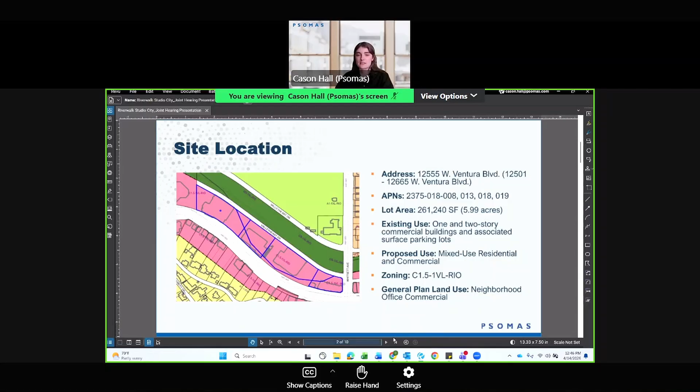The applicant proposes to redevelop the site by removing all existing buildings and surface parking and constructing a new mixed-use project consisting of three 7-story buildings with a total of 814 residential units. This includes 46 units designated for very low income. The project also includes three 2-story commercial buildings, providing just under 76,000 square feet of commercial space. The project will provide nearly 90,000 square feet of open space to serve the residential buildings, including 2 outdoor pools, multiple courtyards, and over 21,000 square feet of private open space. The applicant is proposing 1,806 parking spaces within 4 subterranean levels.

The parking spaces will be designated for residential and commercial use separately. Vehicular access will be provided through 2 driveways on Ventura Boulevard and 2 on Valley Heart Drive, and the project proposes a new traffic signal at the main Ventura Boulevard entrance. The commercial and residential portions of the project will be linked aesthetically by design, but individually distinguished by colors and materials that will create 2 distinct districts. A centrally located landscape plaza will anchor the commercial district, and it will open directly to the LA River multimodal trail entrance at Valley Heart and Whitsett, enhancing walkability and activating the area.

There are several entitlement requests associated with this project. First, the project is requesting a 25% density bonus by reserving 7% of the base units for very low income. Along with that density bonus, the applicant is requesting several waivers and incentives, including increased FAR, increased lot coverage, increased height, reduced rear yard setback, a waiver of transitional height requirements, and a waiver to allow volume averaging with hybrid cutouts and stepbacks.

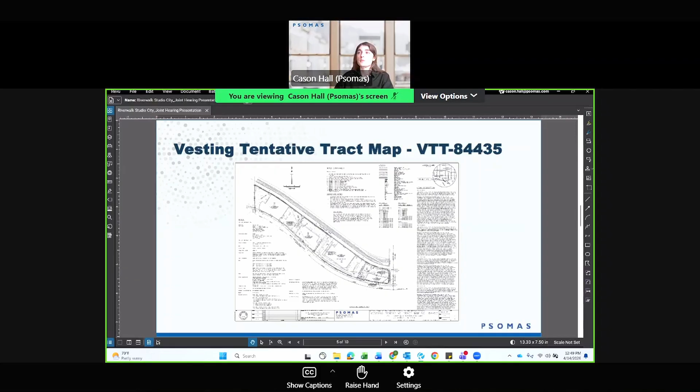The vesting tentative tract map proposes to subdivide the site into 2 master ground lots for 2 phases of development, 3 residential airspace lots, 5 commercial airspace lots, and 8 airspace lots for subterranean parking. The project will be built in 2 phases, 1 for each ground lot.

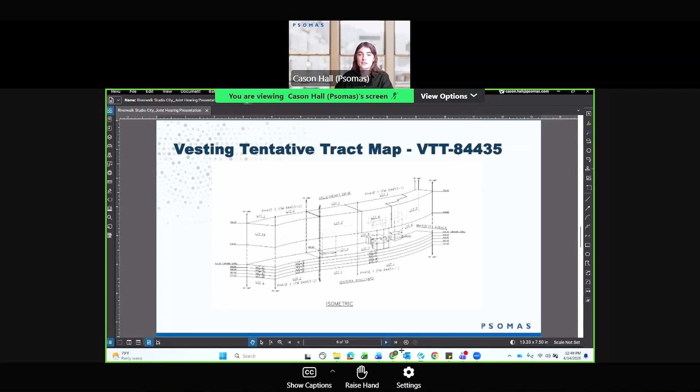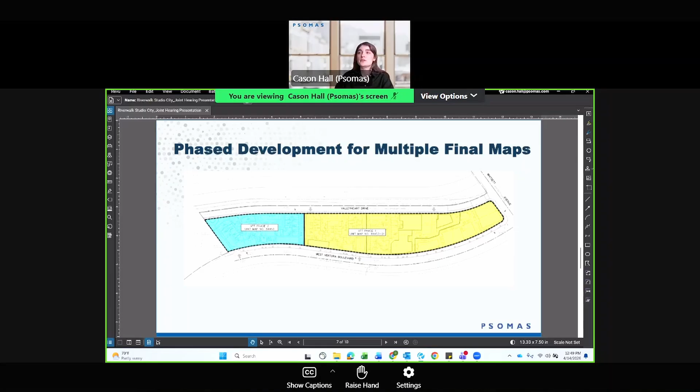As mentioned earlier, the project will be built in 2 phases. Phase 1 includes 2 of the residential buildings, all of the commercial buildings, and 4 levels of subterranean parking. Phase 2 includes the final residential building and its associated 4 levels of subterranean parking.

Throughout the entitlement process, the applicant has conducted extensive community outreach led by Nicole Kuklok-Waldman, who's very familiar with the Studio City area. Outreach has included engagement with the Studio City BID, Neighborhood Council, and Chamber of Commerce, Harvard Westlake School, Council District 4, Friends of the Los Angeles River, and many surrounding property owners and tenants.

The project also maintains an active website, Instagram, Facebook, and Nextdoor presence where updates, event notices, and contact information are regularly posted. The team has also attended multiple community events, presented to the Neighborhood Council in October 2025, and is scheduled to present to the Neighborhood Council Board on April 22nd, 2026.

The applicant also mailed notices to surrounding neighbors and hosted open office hours to answer questions and discuss the project directly with community members. We would like to thank Audrey Melkonian and the Los Angeles Department of City Planning for all the hard work getting to this point.

The applicant team has reviewed the Vesting Tentative Tract Map staff report, and we would like to note a few minor items for the record. The map in the case file currently shows a 5-foot dedication on Ventura Boulevard. This was initially anticipated based on BOE's preliminary review. However, in the full BOE report, it was determined that the dedication is not required.

The applicant has prepared an updated map to stay consistent with the BOE recommendations in the staff report, and this map will be used for future review and for final map compliance. Additionally, the relevant permit listed on page 1, paragraph 4 was the preliminary zoning assessment conducted by LADBS and is not the full building permit application.

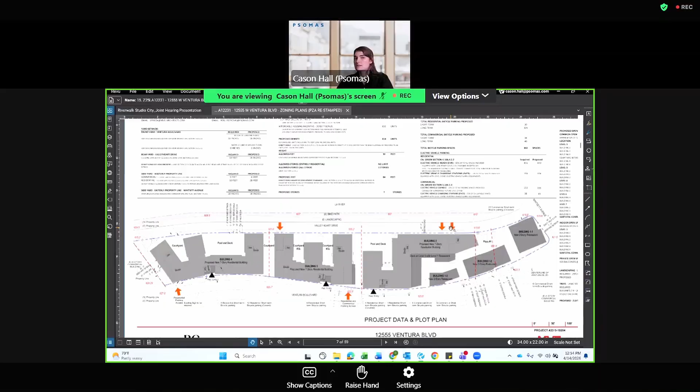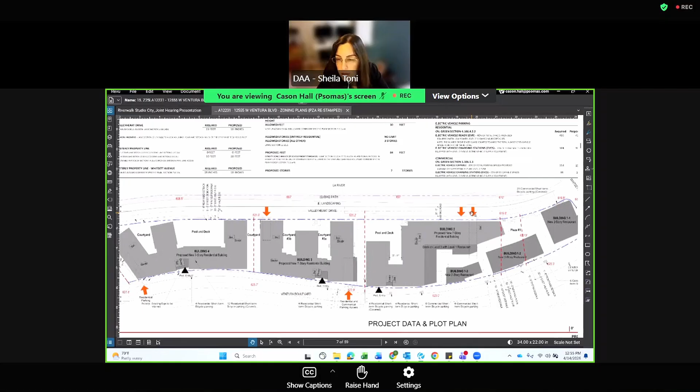Can you state it into the record? So Valley Heart entering and exiting the site is off of... let me check, it's a little small on my end. This site plan doesn't have the arrows, so I think the other one is best to show. I believe there's in and out on this main one, and I need to confirm if there's in and out on all of them, but definitely on this main one, on Ventura, mid-block.

Okay, great. And again, where's the signal? It's proposed in this mid-block, and you can see the proposed new crossings here. These will all be subject to future review by the city and B permit. So this is the proposed traffic light. And all of the entrances will be both in and out.

Okay, and as far as during construction, can you summarize or briefly explain your staging plan and where you'd like to put all the equipment to build phase 1?

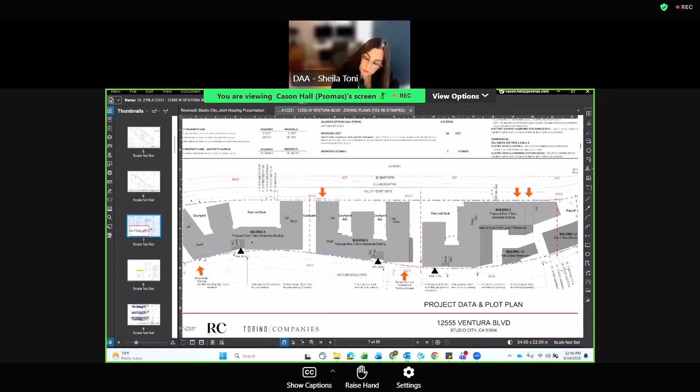Okay, so I have a staging plan, this is from our contractor. They're going to work on the project from west to east. So the western portion, this is for phase 1 specifically. The western portion of the site will be used for staging.

Can you hover over the area for members of the public to see? Yeah, definitely, let me just make sure I'm... take your time.

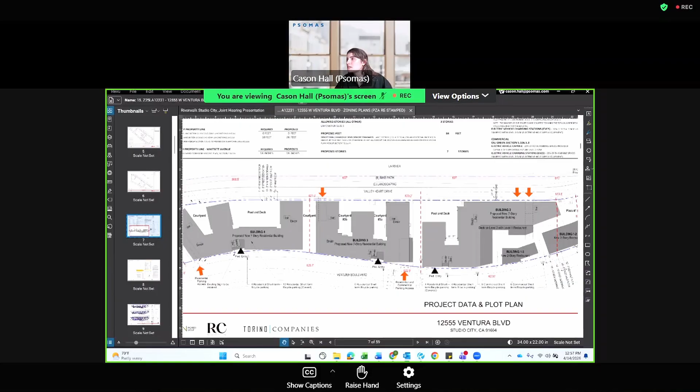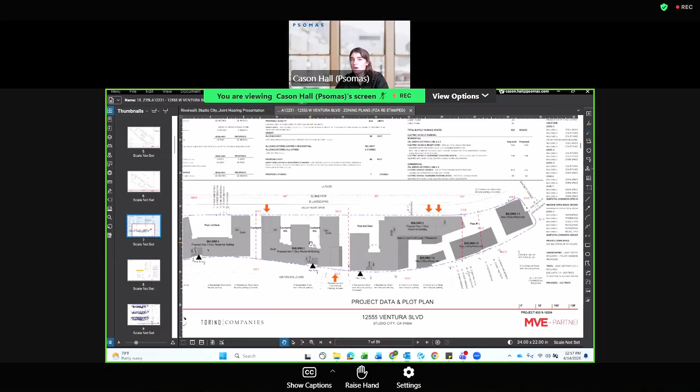So phase 1, essentially the divide is this courtyard. Phase 1 will be constructed first, with building 2 being the first construction, followed by building 3. So they're essentially moving from east to west on the project site, and then phase 2 is over on this side, which will be constructed second, following phase 1.

Great, and what is your estimated timeline for phase 1 and phase 2 construction? For phase 1, the demolition and site work is estimated at 5 months total, and the excavation and shoring is estimated at 22 months.

And then the first building, building 2, is estimated at 29 months, followed by building 3 at 26 months, staggered by 5 months. Then for phase 2, demolition would be 1.5 months, with excavation and shoring at 18 months, and 28 months for construction of building 4.

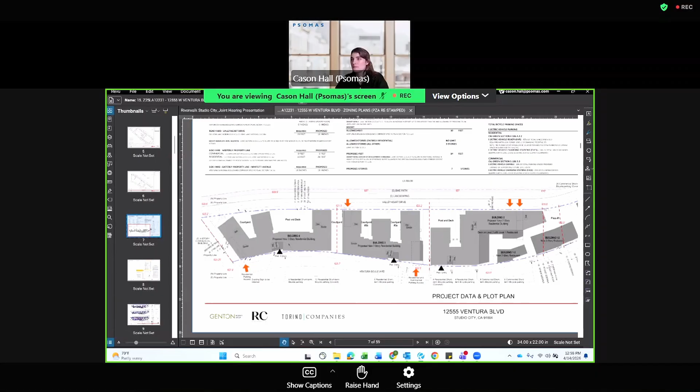Great, I don't have any questions at this time, so we're going to go ahead and proceed, but we may have more questions as we move forward, okay?

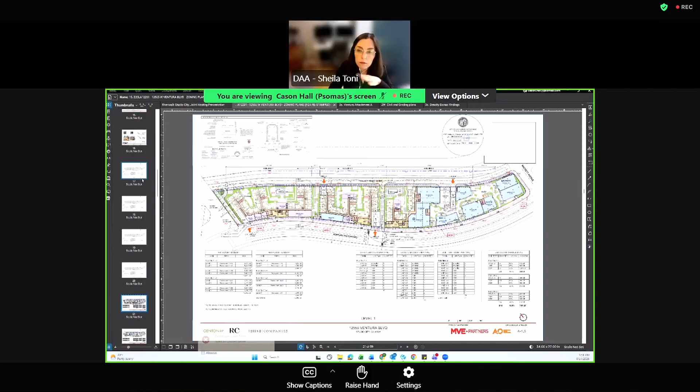Can you show us a section of the parking, like what it is for the residents and parking for the commercial users and how they're separated? I think the public would like to know that. Go ahead, Eugene.

Okay, so lower level, as users get into the lower level garage, it's fully connected across the board. What you will have is gate separation between the residential and commercial uses. There's key card access, whatever pass there is, everyone's got a clicker to get in between. But at the first level, there's potential interaction of residential and commercial parking from the main driveway off of Ventura Boulevard. They will separate to their east-west and lower level parking areas. There will be gate separation, so there will not be commercial users finding themselves in the residential parking. The opposite is true, where residents can circulate back through and get up and down to the street network.

Guest parking for residents is anticipated to be within the commercial area because that is quote unquote open to the public. There will be gate controls, but it is otherwise not segregated in that respect.

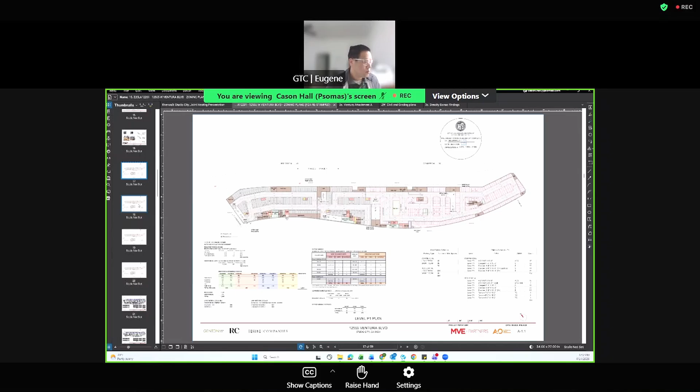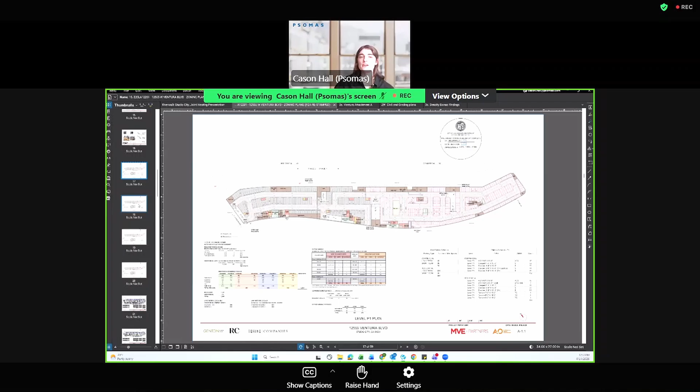Thank you. And just so the public knows, this is AB 2097, so the site is not required to provide parking, but you're providing parking. So speaking about guest parking, guests of the residents coming and using the commercial parking spaces - again, parking is not required, but I believe we're not in the AB 2097 area, so we're providing code required parking. Okay, yeah, thank you for clarifying that.

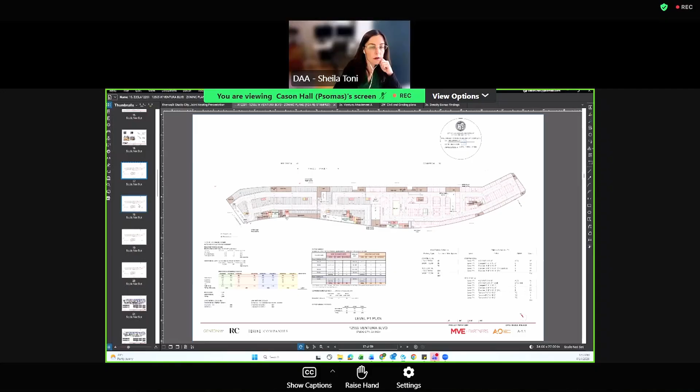Let me see if there were others - I know Nicole touched on it a bit about connectivity with the LA River, but I'm going to ask, does the project provide any improvements that would provide pedestrian and bicycle connectivity to the LA River?

Oops, am I not sharing? No. Okay, it's okay. Okay, can you see that? Yes, we can see it now.

Okay, and is there street parking? There were some comments about that. I believe right now there's parking on the north side of Valley Heart. I don't know if we've gotten any instruction from DOT regarding that parking, but we're happy to comply with anything that they require. Eugene, do you have any more information there? No, there aren't any street modifications along Valley Heart that would preclude the ability to park there. Our intention is to provide as required, and we haven't done anything along the backside that would prevent doing so.

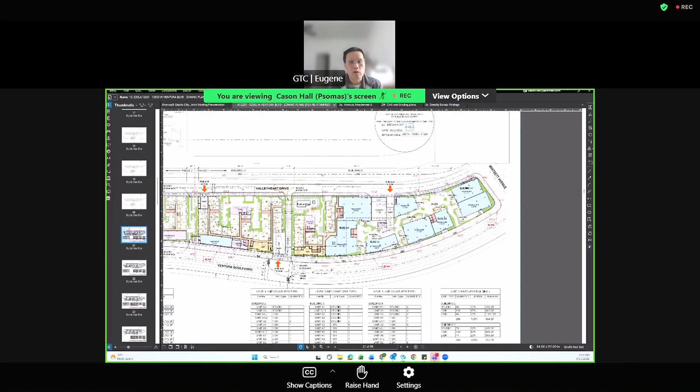There is a question from Marianne King about street lighting and tree placement. Can someone speak to that? Or maybe we can wait until the subdivision committee asks their questions and we can speak more technically to what the requirement is. Do you want to try or wait for that? Let's wait on that if possible. I just want to confirm so we're correct on the record. Okay. Perfect.

All right, those are all the questions I think that hopefully were addressed. Let me just look through my notes really quickly here. If I may, there were questions about the transportation analysis and when it was completed.

Transportation analysis was completed per LADOT requirements. It was completed in 2026 based on recent data, and it does reflect cumulative development in the area and 2026 conditions. It's currently under LADOT review, and the transportation analysis was just recently completed and is working its way through the LADOT review process. That's the comment regarding their guidelines and requirements. Again, it was not assessed during pandemic conditions, so it reflects current conditions. That is correct. This was done per LADOT standards and requirements. It's recent, and yeah, that's the response to that.